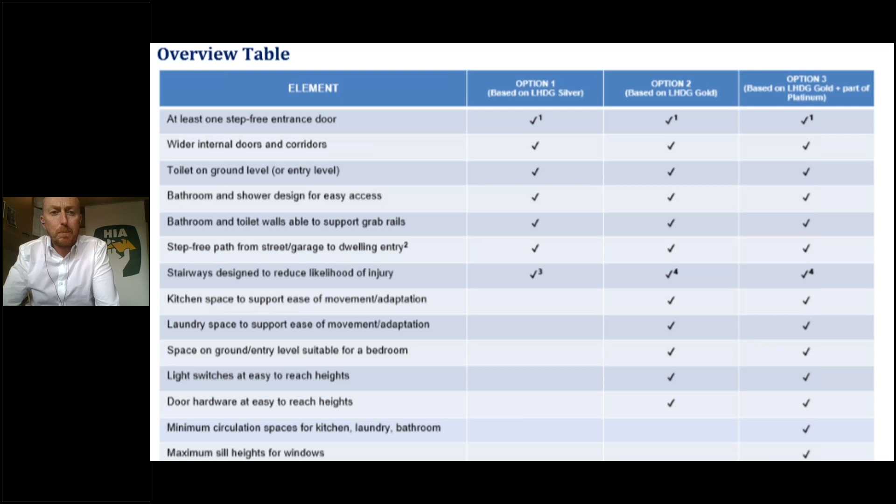So I'll now get into what the actual NCC proposals look like in the draft provisions. And this table here just gives a bit of an overview of what is incorporated in the various elements at the different option 1, option 2, and option 3. I'm predominantly going to talk about option 1, the silver level option, because option 2 and option 3 are unlikely to be mandatory provisions; even the costing shows that there would be substantial costs involved there.

So really a lot of the regulatory conversation, from what we think, is really about either the silver level option 1 or the non-mandatory approach. So I'm going to specifically talk about option 1.

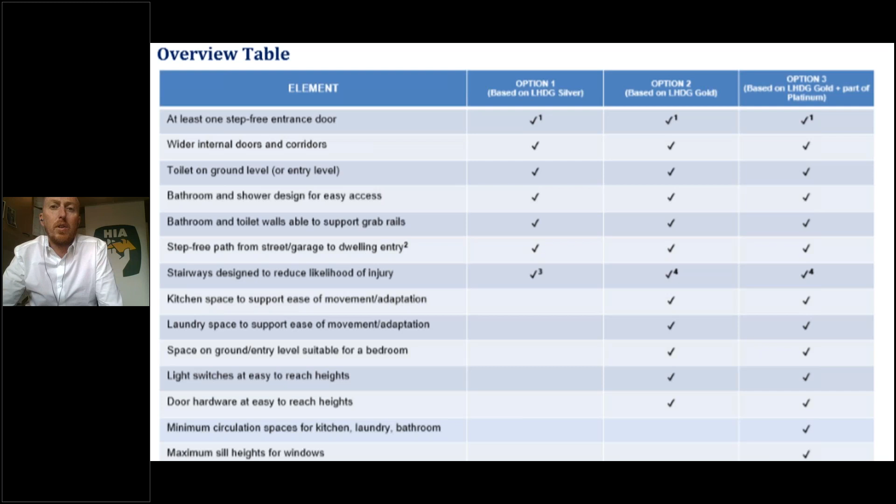And the other part on this one is that for option 1, you're really talking about the entrance to the building, internal doors and corridors, toilets on ground level, bathroom and shower design for easy access, bathroom and toilet walls having the reinforcement for future installation of grab rails, not getting into kitchens or laundries or bedrooms. That's when they trigger into the higher requirements under the gold option or the gold plus option.

So I've got on to the provisions now, and if you've looked at the draft NCC provisions, I've extracted some elements out of them just to try and summarize the provisions. So the first element is about dwelling access, and it talks about a step-free path from the boundary to the front door. This is probably the most substantial of all the items, and also probably the most controversial of all the items too.

So it would require for a house, and these are the same provisions that apply to apartments, a safe continuous path from the boundary to the front door or to an entrance door. It would require that the path have no steps. It also requires that the path would need to be 1 metre wide and have a firm surface. It also prescribes a maximum crossfall that is allowable.

It also then says if and when you need to put a ramp in, the length that the ramp would need to be with landings, and also requires at the start and at the end of the ramp 1.2 by 1.2 clear level space. So this is quite a substantial requirement, and that's under this step 1. And I've just got a couple of pictures here to give some scenarios about the real difficulty that this one potentially could result in.

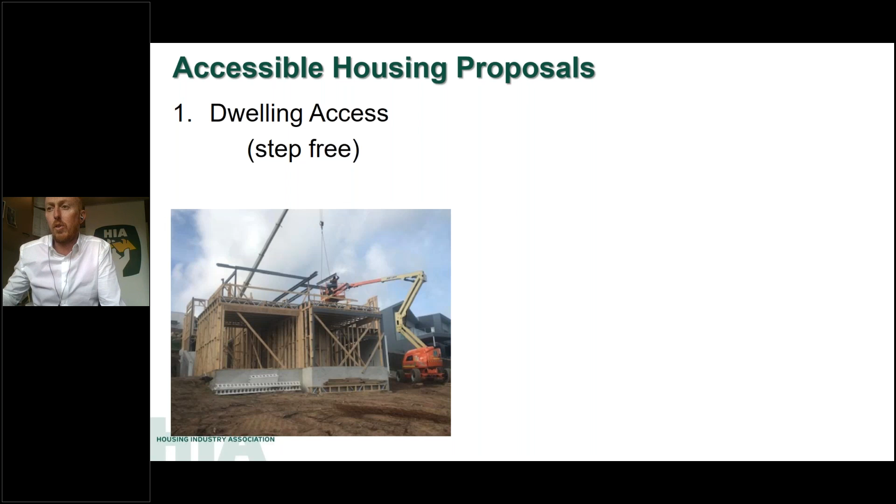This picture now just shows where you might have a split level block as well. A split level on the ground floor, again, would present a real challenge as part of these new requirements as well if they go forward. And here's just another one that would just be extreme to make the requirements apply for these under all circumstances.

Under this option, it does provide an alternate to the step-free from the boundary to the entrance door, so that rather than doing that one, you could go through the garage and have the step-free through the garage itself. And then also the provisions have put forward an option 1B. And that option 1B would allow for 1 step. That could either be in the path itself or up at the entrance door, to allow 1 step with a maximum of 190.

Even with those previous pictures I showed, I think none of those would really be able to still be achieved under those circumstances, even from a relatively flat block as those ones there. It does allow for some minor exemptions from the step-free entrance where there is insufficient space available for a ramp. So where you might have a townhouse that's very close to the front boundary and you wouldn't be able to achieve a step-free entrance or a ramp that would meet that grade requirement.

It also does provide an exemption from the step-free where the slope of the ground is exceeding 1 in 14, or for garage top dwellings or like a Queenslander or a high set house, but that is only an exemption, as noted on the bottom of the screen there, from the step-free entrance requirements. But once you get in the house, all the other proposed provisions would still need to be met, even though you would give an exemption from the step-free requirement.

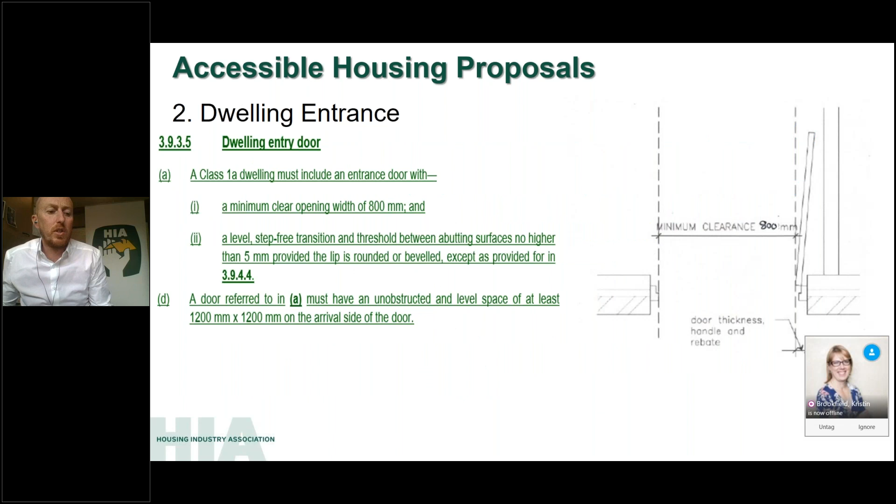Okay, moving on to the second element, and this is about dwelling entrance. The next provision is about requiring the dwelling entrance door for either the house or the apartment to have a minimum clear opening of 800 mil. This one's gone around a little bit. In the Livable Housing Design Guidelines, it says that it needs to have a minimum clear width of 820, which would mean you'd need to have an 870 door, essentially. But the draft provisions have put forward allowing for a clear width of 800 mil, so would likely allow for an 820 door to be used.

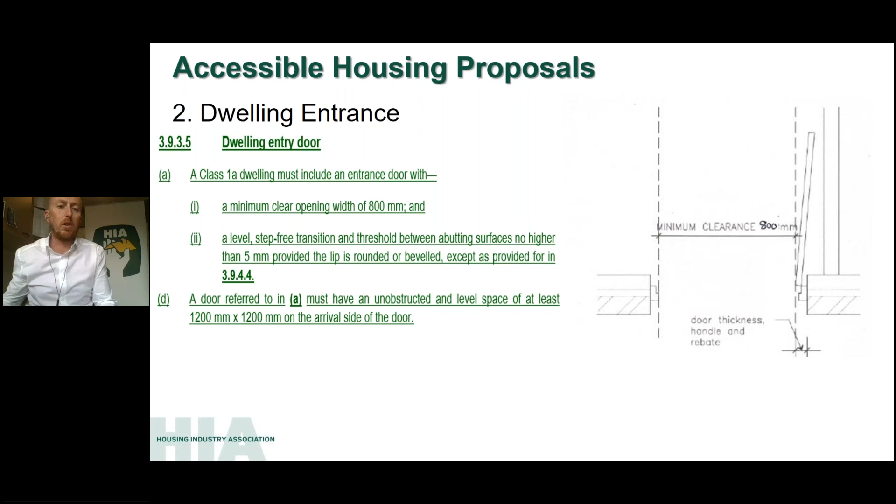The other part to this is that you're allowed to have no more than 5 mil in the lip or the bevel in terms of the transition or the step-free threshold. And then on the inside of the door, once you enter into the house, it would need to have a 1200 by 1200 mil space on the arrival side of the door, which seems a bit contradictory when we get to the next provision, when we talk about widths of hallways. So, sorry, Maya. So just some of those key bits there that I've highlighted on the screen.

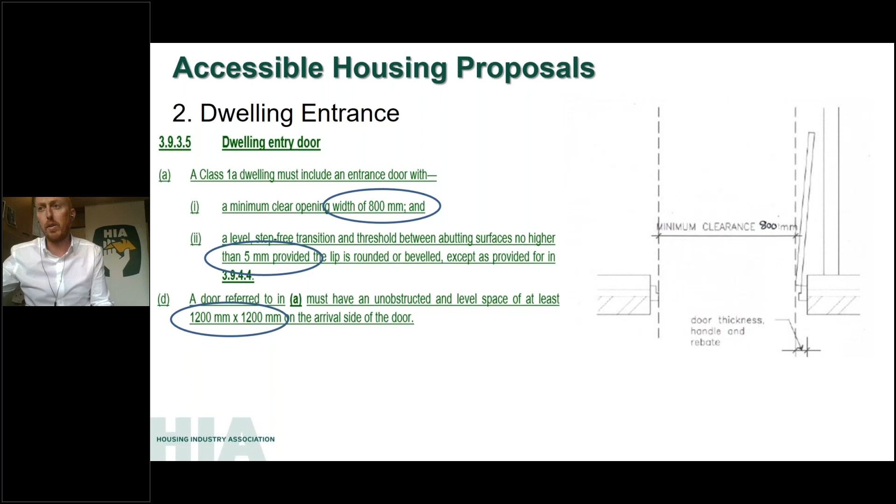So the next element is once we're inside the house, it then prescribes requirements about internal doors and corridors. And it will require, for any habitable room, a bathroom, laundry and sanitary compartment on that same level as the entrance level, to have a minimum clear width of 800 mil for the doors, and it also prescribes a minimum path of travel with a clear width of a metre.

So as you can see, once you get in the dwelling, and particularly for smaller lots and tighter hallways, and building boundary to boundary, the implications for achieving these width requirements would mean that across the dwelling you may need to have a wider hallway, which might reduce some of the living spaces or the bedrooms, or alternatively, when building on very tight blocks, what we're seeing now at 3.8 and 4.5 metres wide, potentially losing some dwellings out of an allotment where the space requirements would mean that you can't achieve it.

It also requires that a toilet must be on the ground or entrance floor, and it also has requirements for the toilet. You've got a couple of different options. You can either have a toilet that's on its own, such as in a powder room, and you'd need to have a clear width from the pan of 1200 mil from the swing of the door, and it also needs to be a minimum of 900 mil wide in terms of the width of the toilet, or the sanitary compartment.

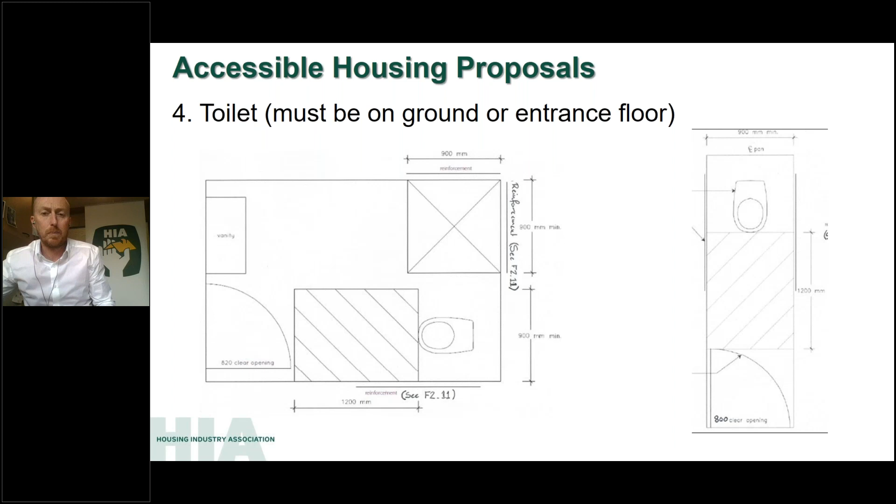For the shower, at a silver level it doesn't prescribe a specific width of shower like it does at the gold levels. So it doesn't prescribe a minimum shower width, but it does require that the shower screen must be capable of removal without causing damage to adjoining parts of the shower enclosure. It doesn't give a lot of guidance in the draft provisions around what that specifically means, but it's saying the shower screen must be capable of removal.

And this is another one that's a bit up for conjecture: having a step-free shower, but it's also now giving a concession to say that you're allowed a maximum of 25 mil step up to the shower. That's been one of those ones with conjecture around it, whether it needs to be step-free or allow some sort of lip into the shower, where you might be trying to have a step-in shower but you haven't checked down the slab or the flooring, and therefore you need to meet it through this means.

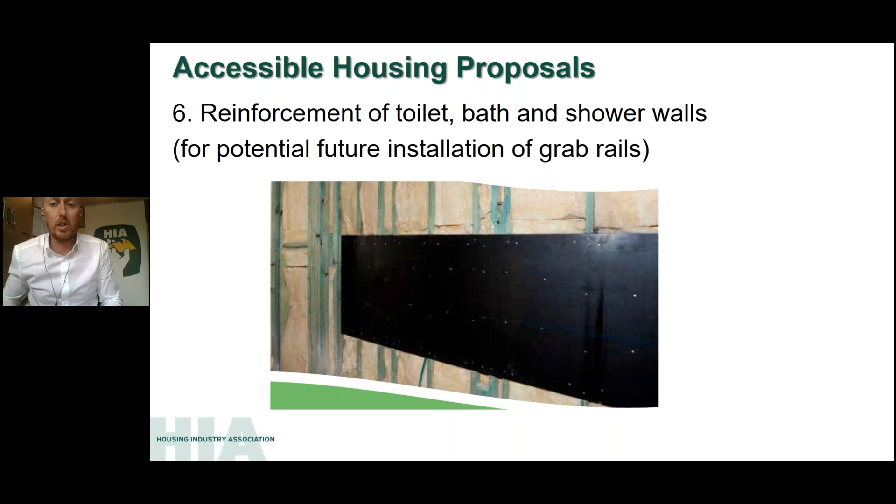The other part to the provisions around toilets, baths and shower walls is the inclusion of sheeting or noggins to allow for the future installation of grab rails, and it gives quite prescriptive measures around how you need to do the sheeting in the wall, or it does allow for where you've got some types of bricks or other things that would be fine for allowing the future installation of grab rails. But yeah, it does provide quite prescriptive requirements about where you need to put the noggins or sheeting in the walls as part of that reinforcement.

Another provision that's been added is about access to balconies and outdoor areas. So where you have a balcony on the ground level or the entrance level that would allow them to go out to the outdoor area, it'd have to be step-free and have that level threshold again. It does provide an alternate option to allow for one step of 190 mil, but this is again a little bit up for conjecture, and also about whether you would need to set in the sill for the window or the door, where it might be a stacker, sliding door or bifold door with a substantial sill on it, checking that in to achieve that level step-free.

So as I mentioned, all of these provisions apply to houses, apartments, granny flats and a whole range of different dwellings. But for apartments, there's also an additional requirement I wanted to highlight, which will have substantial implications: it will require that each sole occupancy unit that has a car parking space have at least one car parking space of a minimum of 3.2 by 5.4, which is substantially larger than common car parking for apartments. I think they're around 2.5 or 2.4 by 5.4.

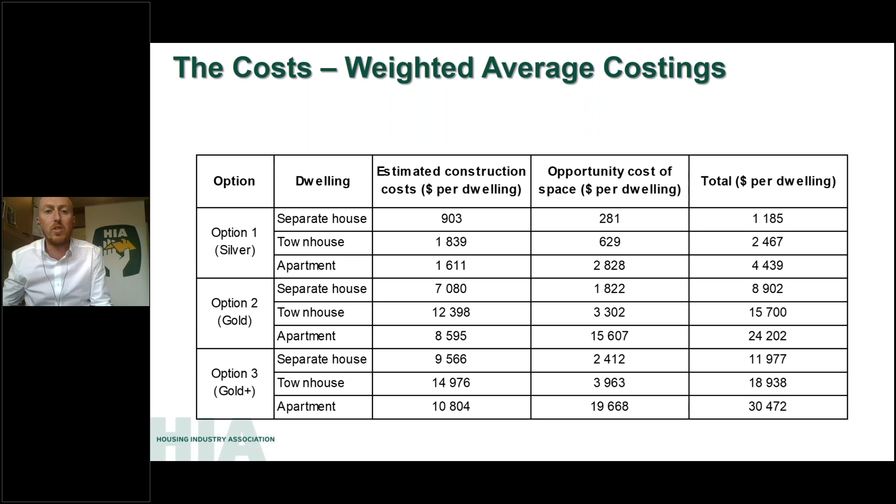So the cost, what hasn't been included? It hasn't really done any reduction in the number of lots in a residential development, which everyone on the line here would likely know would be a substantial implication. There's no costs really been attributed for the additional excavation costs that would be required to enable the dwelling to meet the entrance egress requirements.

HIA has put forward, and it's listed in the RIS, that the costs for excavation are likely to be extreme. And we've put forward some numbers which are probably conservative, to be totally honest, around $2,600 per dwelling to be able to achieve the requirements from an excavation perspective. But they actually haven't been accounted for in the RIS at the moment. They're just noted in the RIS. So if you're thinking about putting in a submission, something I'd focus your attention on.

It hasn't really taken much account of those issues that are going to come for the impact for car parking for apartments and the redesign and the additional space requirements. Going to a 3.2 metre wide car parking space in an apartment is going to have significant implications for each SOU, each apartment across the whole apartment block, and also the changing construction detail, the additional excavation or levels that will be required there. And we have been talking to some developers in the apartment space, and some of those numbers are much more substantial than has been attributed in the RIS.